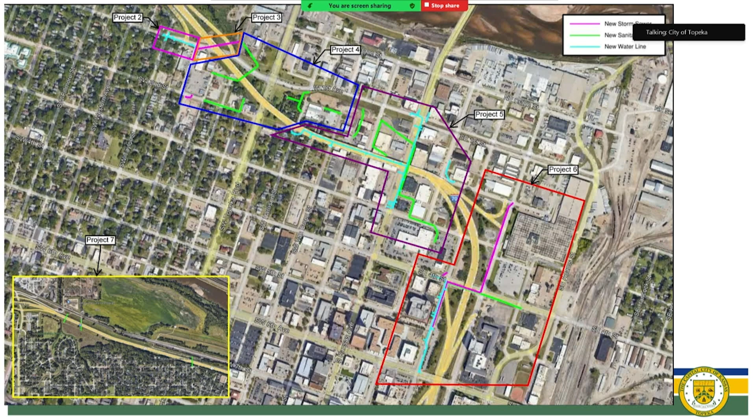Project 2, we're happy to report, is complete. Many of you have heard that, but we were able to finish this water line work in January.

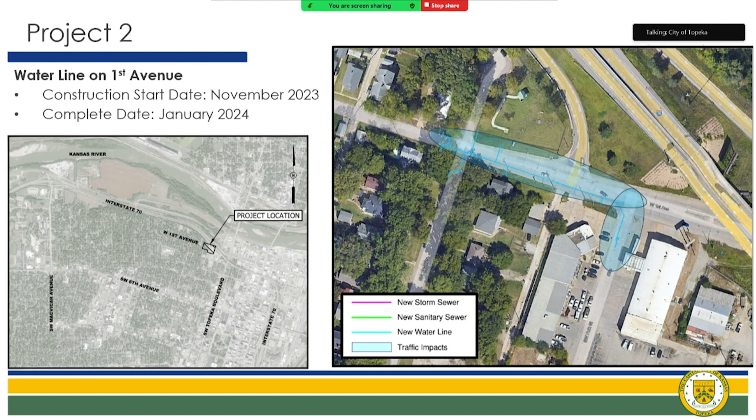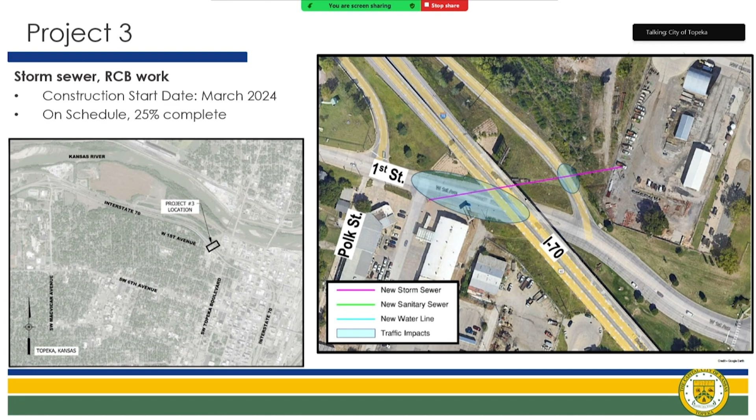Project 3 is some very large reinforced concrete box work and storm sewer work that goes under the on-ramp to I-70 there. We started this in March, and we are right on schedule, 25% complete with this project.

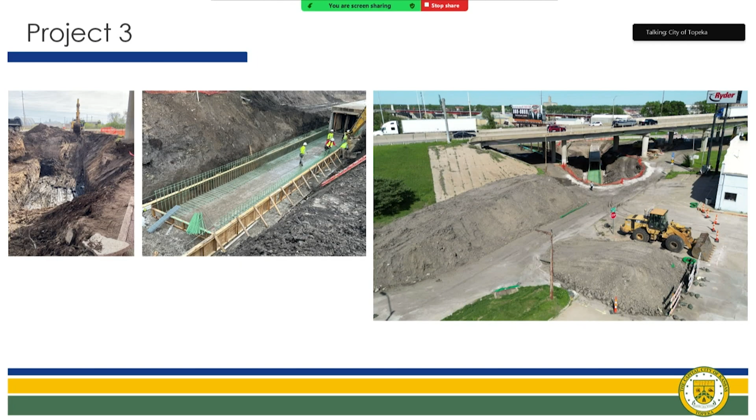I wanted to share some construction pictures with you all so you can see the magnitude of the work being done. If you are avoiding this route, which you are smart to do, you might not see some of this. It's pretty impressive. A lot of folks have been interested in what's going on over there, and these pictures really help to understand what's happening underground.

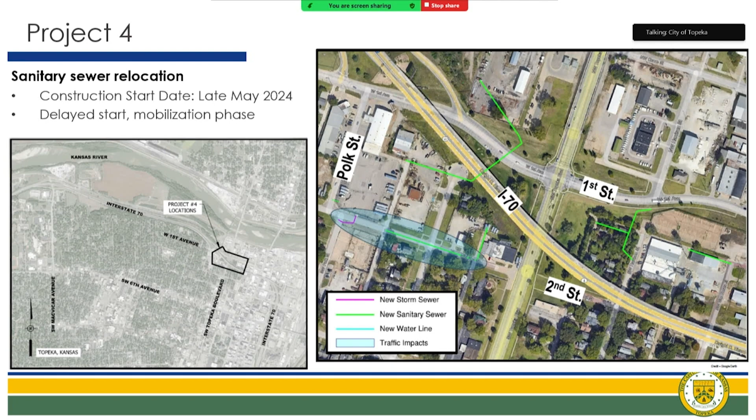For Project 4, we are doing a lot of sanitary sewer work, and there's just a small amount of storm work on this one. We started late May, so we're just getting started. We were delayed a little bit. We're really in the mobilization phase, so about 3% of our project schedule is completed, but we're getting that kicked off and rolling. That's why I don't have any pictures of the work yet.

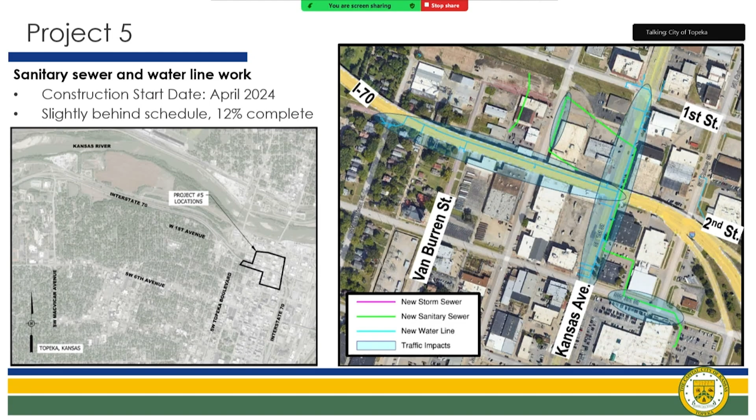I just want to add, we've had some really great coordination meetings again. Last week there was a big meeting as we're reviewing the traffic control plans, and engineering and public works have been really, really helpful, along with our infrastructure engineers, trying to keep the bridge open so that folks can maintain access there. It's going to be wild, a little ugly, but keep posted, keep looking at our social media, and look for those updates so that everybody can see what's going on, because you can still get there. It's just going to be a little different from what you've been experiencing.

Again, some pictures of that work happening there. Kind of see the size and magnitude of what we're dealing with.

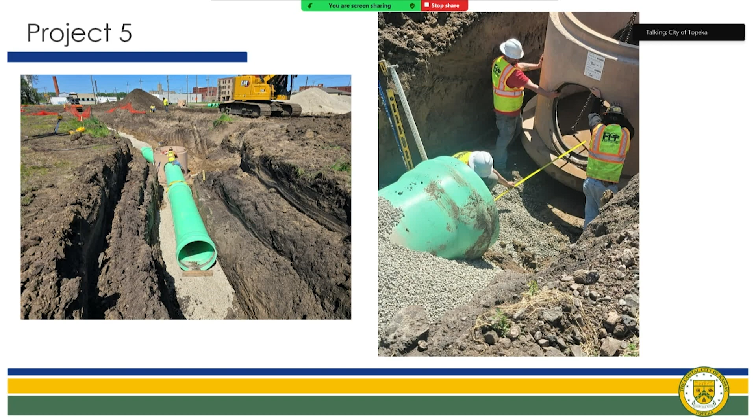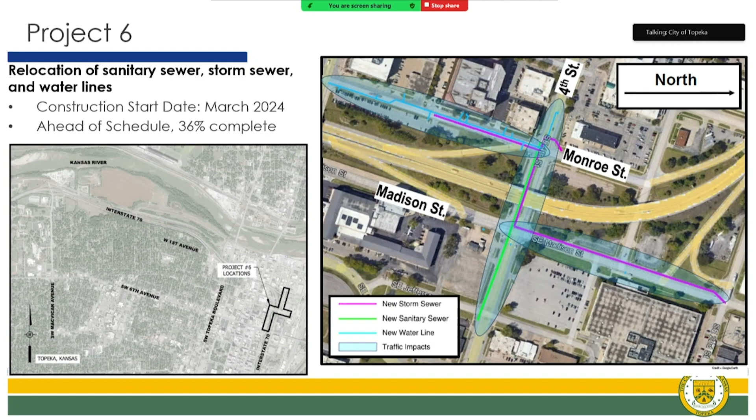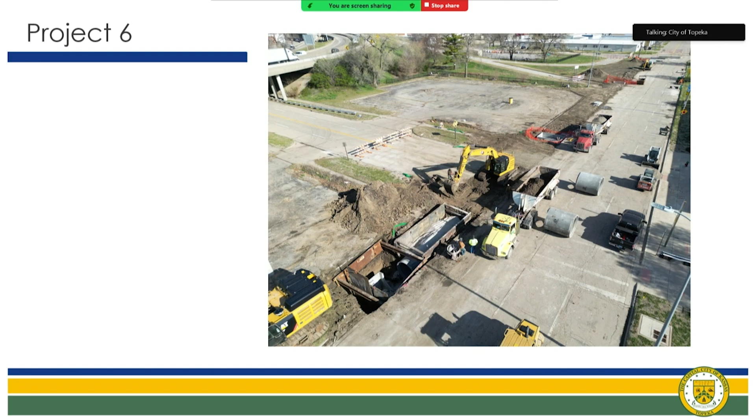Project 7 is a lot of sanitary work that we're doing. We started that in April, and we're really doing great here, ahead of schedule. We're 73% complete with this work.

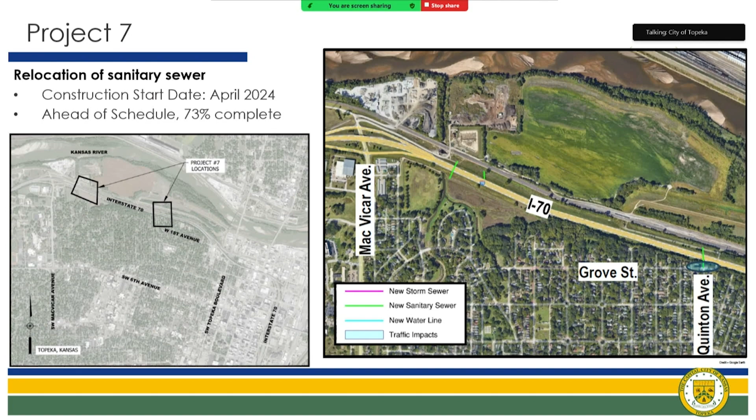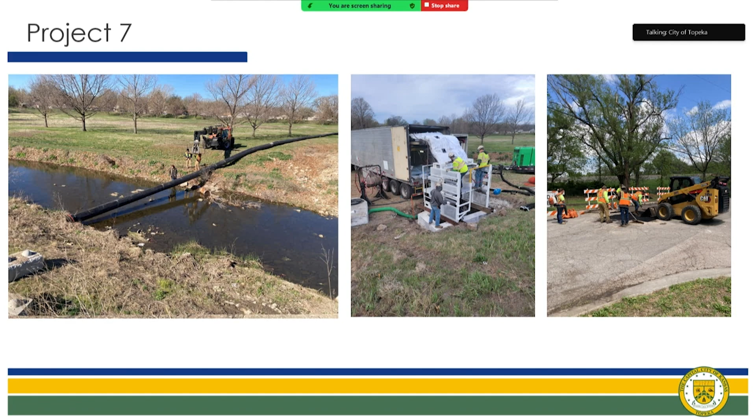So really that's it. I wanted to open it for any questions you all might have, and then again, direct everybody to the city's Polk Quincy Viaduct utility page, which can be found at this link. It's going to give you all of these updates on each project and more.

The other thing I wanted to direct folks to is, if anybody is interested, Braxton and team have met with our groups and TSG, and they've been working really hard to get that portal you guys requested, to see where the detour routes and closure routes are for all of our city projects. So if you go to topeka.org and look on the homepage, there's a button that says road closures. If you go to that button, it's going to bring you to a map that shows you where our road closures are and what those detours look like for major traffic impacts.

Thank you. The email blast, is that through community engagement? Our staff are sending those out. We've worked with our communications team, and after everybody signs up on that list, it gets sent out as a mailing list. If you could give us that, that would be appreciated. I know community engagement is sending out some email blasts, so if it's something different, I want to be able to share that with my constituents, as well as I'm sure other council members.

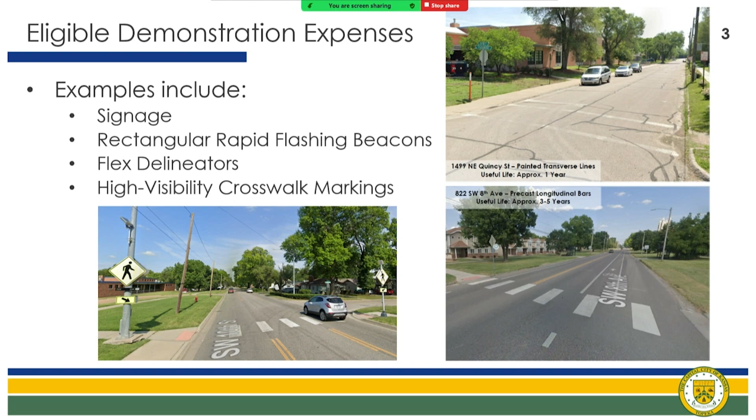Our hope is to go out to these school zones and immediately begin some of that work while we await the RFP process and getting that plan document prepared with community engagement to really start honing in and targeting exact locations.

Another key component of why our application as the city was so strong is that some of this groundwork was already laid in the previous fiscal year through Shawnee County. Shawnee County was awarded funding for Safe Streets for All for their CSAP, or Comprehensive Safety Action Plan, in 2023. At this time, they're pending an RFP for the development of their plan with their consultant, and the goal is to complement their plan to close the gap with our combined road networks.

And in combination with that, our staff time put into this, all the effort we've gone through as a collective team, and the information sharing we've been able to do to supply substantial information for this grant has been tremendous. I just want to give a shout out to staff, because it truly wouldn't have been possible without that coordination, doing the legwork in-house, and engaging with these stakeholders.

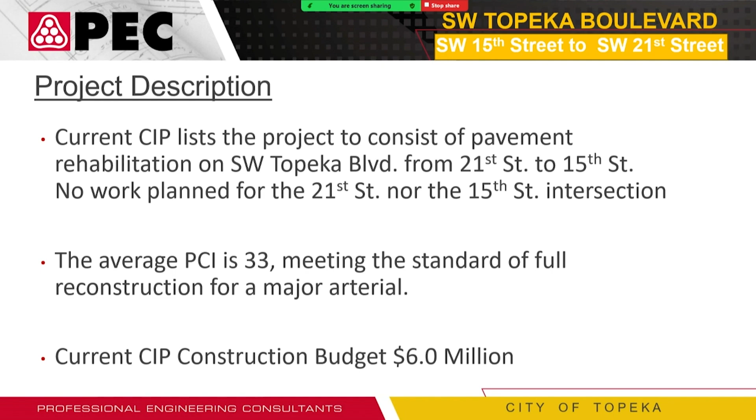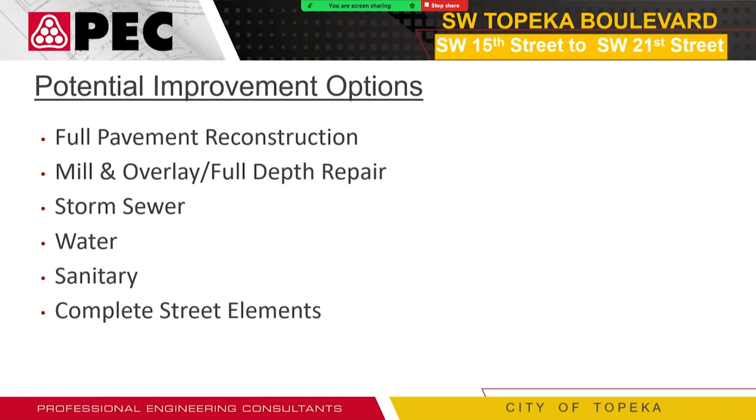So we looked at some of the improvement options here, starting with full pavement reconstruction versus a mill and overlay with full depth repair, but also what other infrastructure improvements we can do, including storm sewer improvements, water main improvements, sanitary sewer improvements, as well as evaluating any complete street elements we may need. As Braxton mentioned, we did a geotechnical investigation to analyze the pavement, performing 12 subsurface borings, which included going about 5 feet below the existing grade.

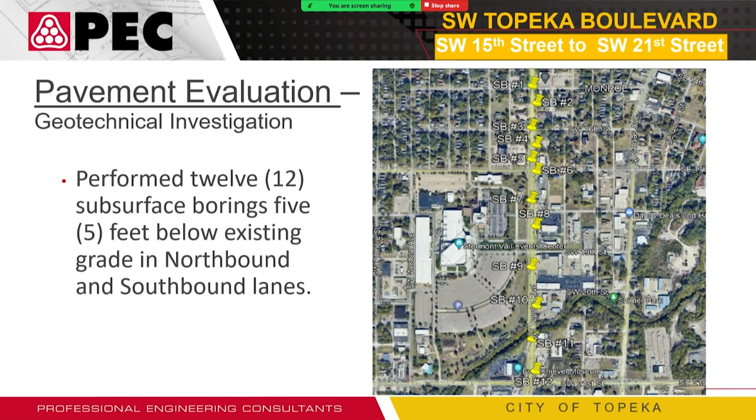We did this in multiple lanes, various lanes throughout, northbound and southbound, so we could get a good mix of all those borings. I'm going to show you 3 pictures of 3 of the borings, which summarize that these borings are throughout the entire stretch.

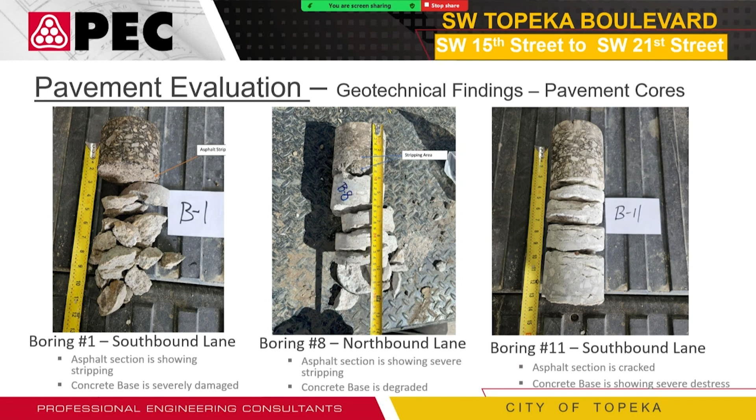So with that geotechnical evaluation, with the pavement core showing the existing roadways in severe deterioration, the findings recommended full pavement reconstruction, which lines up with that of the PCI index.

One thing we did want to mention is that as we move forward with this project, we would be looking at doing alternate bids for concrete or asphalt, a flexible pavement versus a rigid pavement. That way it'll allow the city to analyze the bid prices that come in for both options and choose the best option from that direction.

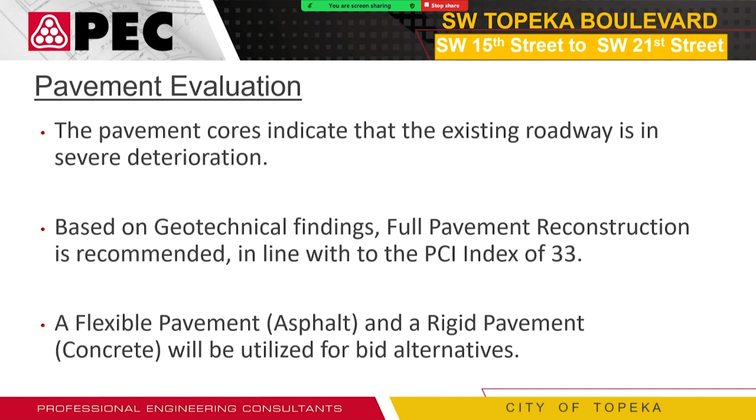Some of the additional elements that will also be improved with the roadway is resurfacing the existing bridge over Shunga Creek. Then the 17th and Topeka Boulevard intersection would include full replacement there, as it is very severely deteriorated. Replacing any of the ADA ramps and sidewalks that don't meet current ADA guidelines and requirements. Also looking at adding a shared use path along the Stormont Vail Events Center property that could range from a 6-foot shared use path to an 8-foot shared use path.

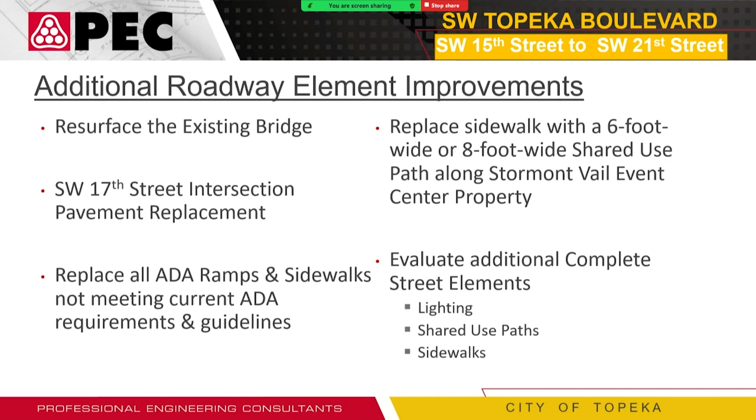Some of the complete street elements we'd also analyze were street lighting, additional shared use paths along the stretch of Topeka Boulevard, or any additional sidewalks. With some of the utility replacements, as Braxton mentioned, we're looking at water main replacement for a full replacement and a new crossing across Shunga Creek. Storm sewer rehabilitation, whether evaluating full replacement versus repair options, and the same for sanitary sewer, evaluating that for replacement of any structures or any line repairs that are needed.

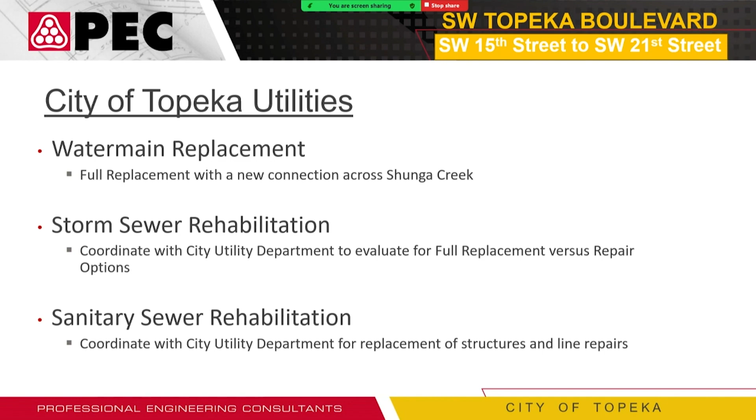So I'm going to quickly go over some of the utility replacements that we have found. Looking at the existing water main on this stretch of Topeka Boulevard, it is an undersized 6-inch cast iron pipe that was installed between 1892 and 1947, so easily almost over 100 years old in some areas, and looking to replace that with a 12-inch PVC main.

Also, as I mentioned, adding a new crossing across Shunga Creek would help create a loop and help with redundancy issues for any water main breaks in the future. Currently that project is under contract for design and funded by the Utilities Department.

On the storm sewer, we'll be looking at doing a hydrologic and hydraulic evaluation of the existing system to determine capacity, as most of the section south of 17th sits in the new FEMA floodplain that was adjusted a few years ago. We're also coordinating that with the City Utilities Department to evaluate any of the existing structures and pipes for their conditions.

As I mentioned, the intention is to rehab or replace the corrugated metal pipes and replace any of the system where it does not meet current city requirements for the storm sewer.

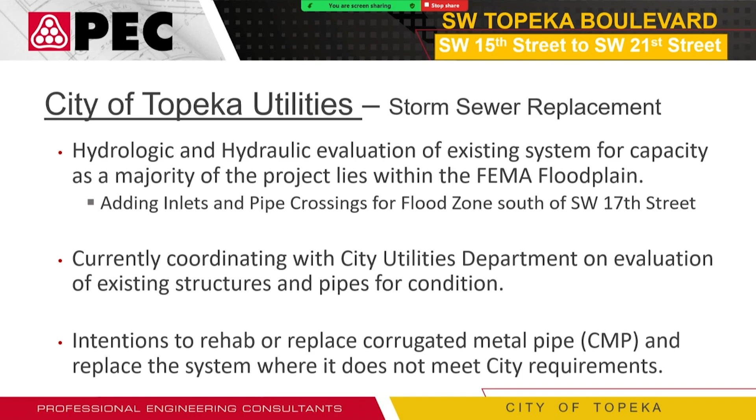On the sanitary side, we'll coordinate that with the utility department as well. There's not much sanitary sewer running linear with the street, just mostly crossings. We have crossings at 20th, 18th, 17th, and 16th Street. But most of the structures that are in the street itself are brick manholes, and typically those have been replaced here recently with any infrastructure projects, and the lines crossing within those brick structures are aged clay pipe.

So with the utilities covered, we went back to the pavement to see what that field evaluation would look like for a full replacement versus just a pavement rehabilitation. Bear with me for a little bit. I have a map on the next page that will help show these colors in red and yellow. But if we do a mill and overlay option with pavement rehab, the following would still be required, which are shown in red.

The 17th Street intersection that I mentioned for full replacement, the bridge repairs and any resurfacing over Shunga Creek, the water main replacement and any pavement associated for that replacement, and storm sewer replacement and rehab and any pavement that is associated with that.

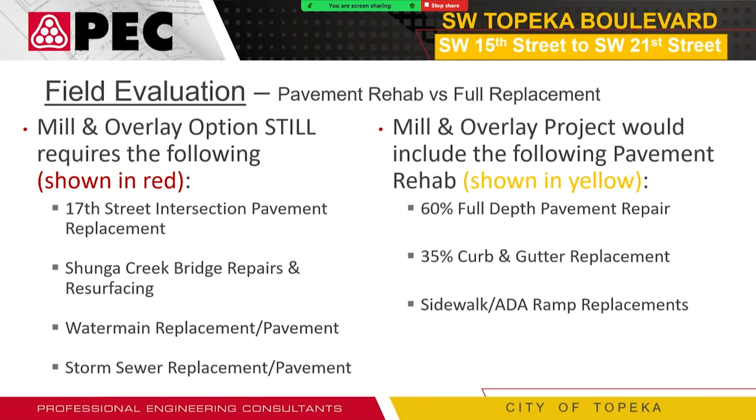On top of those, we then looked at evaluating how much of the pavement is still in acceptable condition, and we're anticipating that 60% of the remaining pavement will require full depth patching, and about 35% of curb and gutter will need replaced, along with any sidewalk and ADA ramps not meeting current regulations. Here is a map showing all those highlighted areas of how much pavement we would intend to replace with a rehab project.

Looking at a rehab, we're still estimating over 70% of the pavement will need to be replaced. And looking at costs, we're estimating that a rehab project would cost around $5.3 million for the pavement and storm sewer only, so we can compare apples to apples.

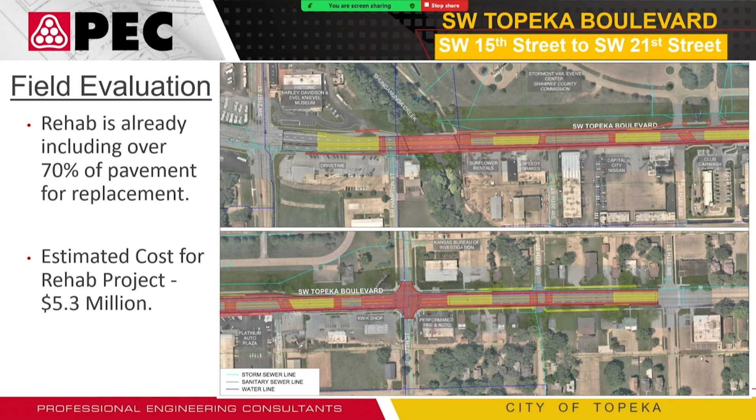So in conclusion, we're recommending full pavement replacement due to the geotechnical findings and the extensive needs for the pavement rehab. Comparing apples to apples, that's $6 million for a full replacement project versus $5.3 million for just a rehabilitation project. Along with that, we would follow any utility improvements as recommended by the City Utilities Department. I'm happy to answer any questions.

Are there any questions or concerns?

Mr. Dobler? Yeah, just quickly to Public Works and the consultant, PEC, appreciate the evaluation. It was a little boring for a couple of slides, but I think the boring actually illustrated the condition of the pavement and why it makes sense to go forward with the $6 million project, as opposed to trying to save a few bucks and having to come back later and do it all again.

So thank you, I agree that was a very thorough explanation. Thank you. So thank you for that.